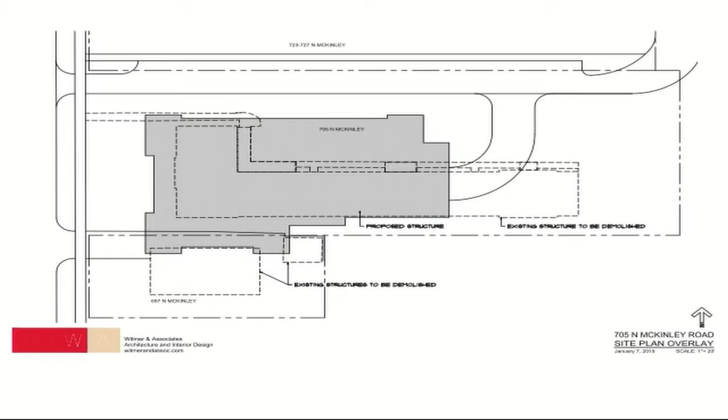It has 5-foot setbacks all around, and I think we respect that in all the setbacks. On the south side, we have 19 feet to the building face, and then 16 feet. Where our stair tower is in the corner, it gets a little tight at 6 feet, then back to 13 feet along the south edge. On the back corner, we have 33 feet from the new outlot to the back piece.

Just as in the first building, the terraces outside are important for those first-floor units since these are single-family residents, so we've developed outdoor areas that matter for those units. There's a screened porch along the south elevation, a terrace in the southeast corner, and another screened porch and terrace in the northeast corner.

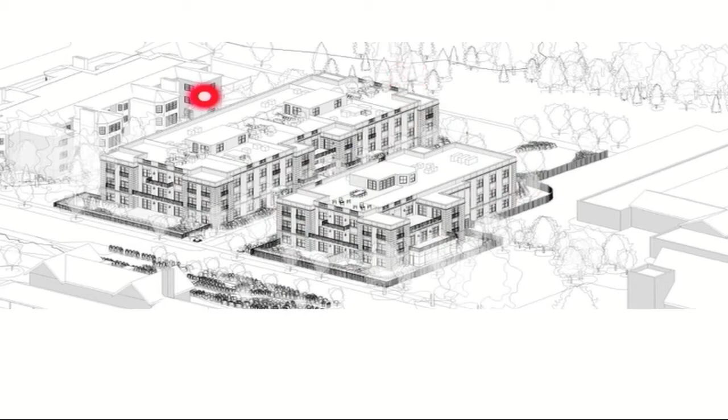This is just a bird's eye view looking at it from the south, actually looking northeast. This is our project that we're looking at, and this is the existing building, to give you an idea of how they fit together three-dimensionally.

This is looking back at the east elevation. So this is the existing building that's here currently, and this was our proposed building for phase 2. You can see the ramp that goes down underneath to the parking.

There are 6 units in the building we're proposing, and I think we have 17 parking spaces in the lower level. The shared parking will be perpendicular to the street, with parallel parking along here, and a couple of service spaces down in the northeast corner for additional parking.

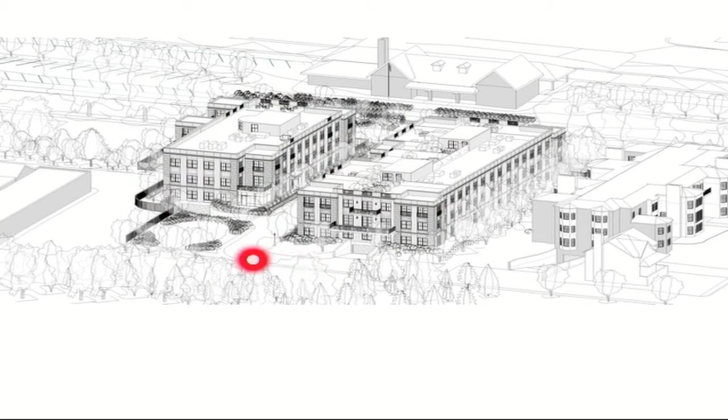The pedestrian access through the site allows people to walk through the street system and also walk through to the library via a sidewalk that connects this up. We talked a lot about pedestrian access for the overall project and making it pedestrian friendly, and I think our sidewalk system allows for that, so people can walk through the community.

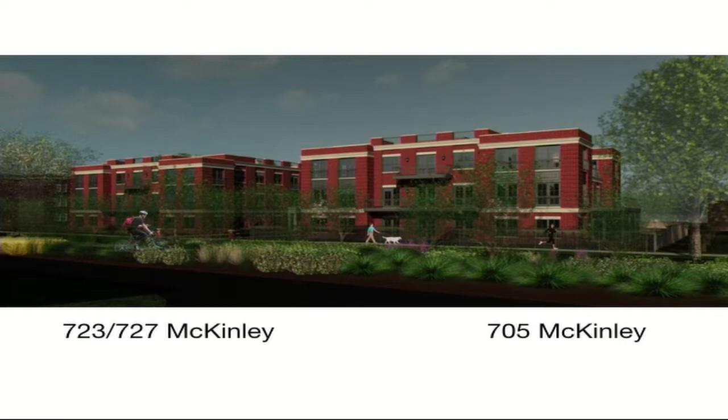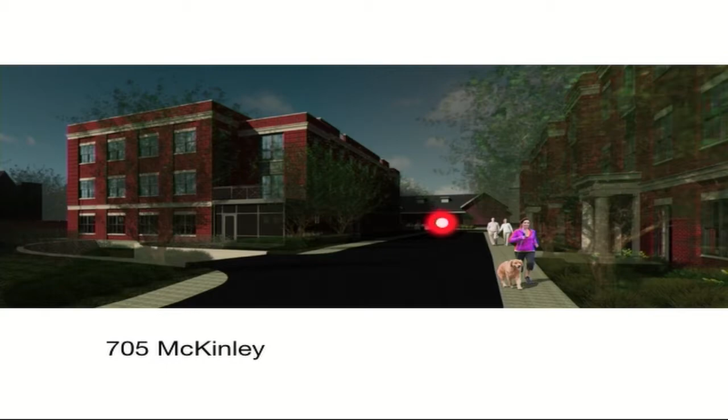This is just a picture of the first building, and this will be the 2 buildings together. This is looking west, so that's the train station here. Basically, all our detailing is really mirrored on the existing building—it's sort of a kit of parts that we put together to fit the configuration of the site on phase 2.

Thank you, Chairman Karen, members of the commission. This project has been under discussion for a number of years.

In 2014 and 2015, the City Council appointed an ad hoc committee, the Cultural Corridor Committee, to look at the area on the east side of McKinley Road between Westminster and Deerpath. The city knew that the Historical Society was looking for another location, so knew that city property would be in play.

We acknowledged that the office buildings, the three office buildings located on the east side of McKinley, were something less than Class A office space. And as the ad hoc group talked about it, they really discussed the importance of bringing residential development back adjacent to the central business district.

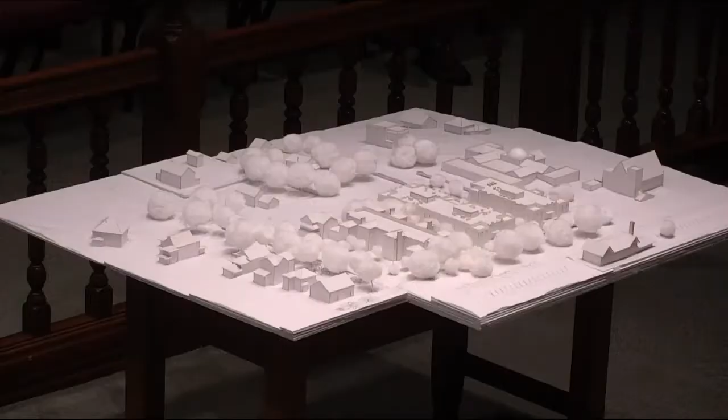So this piece before you for official action requested is approval of a plat of subdivision. A plat of subdivision is required because a portion of this property is being dedicated to the library, and now with the church property being part of this development, a subdivision plat is needed to identify Lot 1, which is the area on which the improvements will be constructed: the building itself, the ramp to the underground garage...

...the open space, and the outdoor patios, and then the outlots: one for the library, one outlot A, which will be retained by the church. As Mr. Wilmer said, it's the southern 20 feet of the existing lot on which the house is constructed.

So what is before you is the plat of subdivision. This project was before the Building Review Board last week, given that what is proposed is a building that essentially replicates the architectural details and exterior materials of the first building, with some change in massing.

With the schedule, we determined that moving this forward to the Building Review Board was appropriate in advance of your discussion, because the overall master plan had already been approved by the City Council. So this was essentially a piece of a previously approved plan.

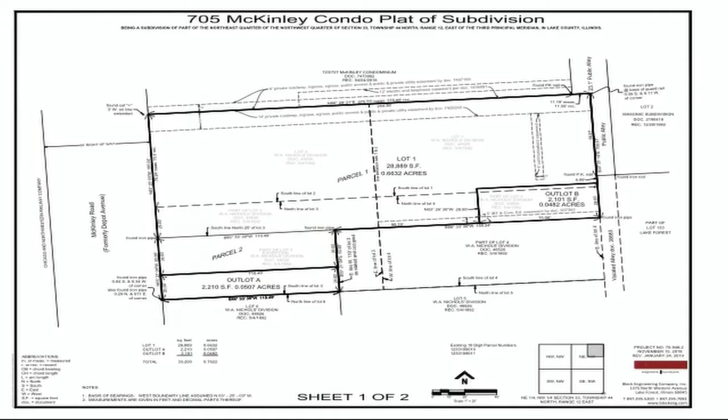Okay, yeah, so that was going to be one of my other questions. That church lot, Outlot A, it's a buildable lot then that the church could use in the future or sell it to somebody else and create a structure on that property, correct? The Outlot A, as it stands alone, a 20-foot wide lot, would not be a separate buildable lot. It will be combined with the church property, but the church certainly has enough property that they could in the future subdivide off the northern portion of their property if they chose to. Okay.

So my question is also a little bit about this open space and the trade-off between the land that the City of Lake Forest is selling, the eastern portion. So my impression is that the City of Lake Forest sold the eastern portion in exchange for some open space in this development. So we end up with a relatively small park to the east of the proposed building, and some land that's donated to the library. Is that correct? That's correct, and obviously there's a monetary exchange as well. Oh, okay.

The intent was not to create a park. This isn't intended to be a city park. It's simply a landscaped area to provide an opportunity for the library in the future to perhaps establish a better articulated north elevation, or perhaps to provide some improved pedestrian access to the library. So it wasn't intended to be a park, but more of a landscaped relief area.

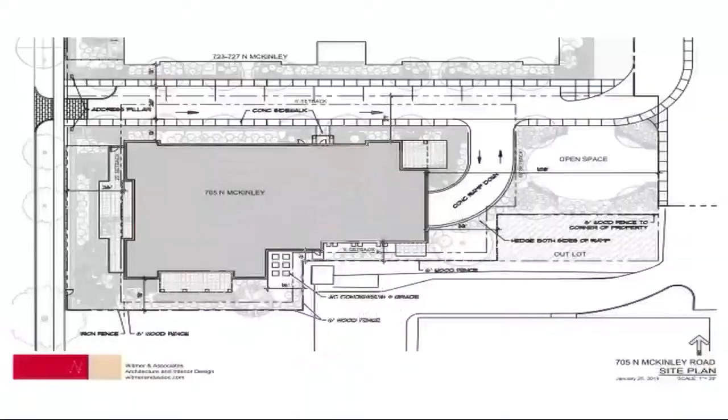Correct. All right, but right now the way it's designed, there's a 6-foot wood fence that would run all the way around the perimeter of the parking area, the building itself, and the parking area. I could understand why, from the residents' point of view, a 6-foot wood fence makes sense, because it shields the view of the back of the library. But my memory of the master plan, and the task force the city set up to look at this...

...was to make this, in fact, a corridor. They called it the cultural corridor, and there was supposed to be flow. To me, that flow, and I remember our discussion quite clearly, was not just pedestrian flow, although that's very important to the objectives, but you gave a really good description of the visual flows.

So when I look at your 3D diagram, here the property is, first of all, a great use of the property and a great partnership between the city, the neighbors, and the developer. But I'm worried, because you've got these 2 really unique structures: the beautiful now-historical train station, with a corridor view through to that, and the rotunda at the library. So these residents are going to benefit from these wonderful historical properties and views.

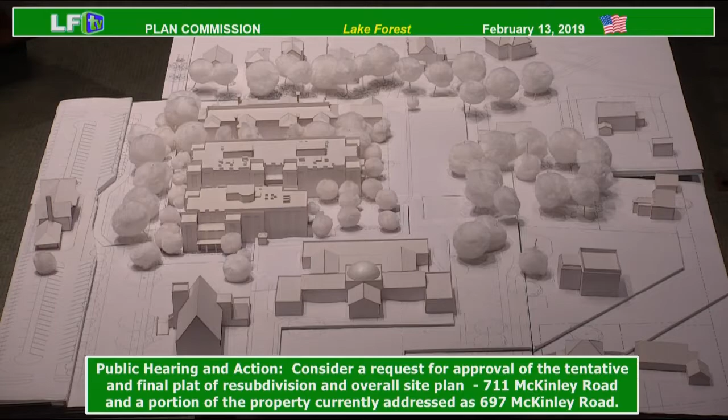I'm just concerned that we're going to throw up a wood fence around what could be a more open space, a more inviting corridor. Are we going to rush to pave over that area and make it 8 parking spaces with a big wood fence?

That's not what I signed off on when I was thinking of the master plan. I worry about those sightlines, and I don't know if that was discussed at all with the library. Are they still open to land banking? Where are we at on that?

I can tell you that the library would like those parking spaces tomorrow. They do believe they have a parking issue, but the library is going through its own contemplation of some possible changes. So we can certainly raise that discussion and pause and think about it. But I do know the library misses the spaces they used to use behind the Historical Society, and on most days, with their increased programming, they feel their parking is overflowing.

My thought there is, is there not a way we could create a pedestrian corridor from the newly remodeled and improved parking spaces right there across McKinley, and really do what the task force set out to do, which is create a corridor here, maybe more than one, Kathy, because 8 parking spaces is not going to solve some event that the library has.

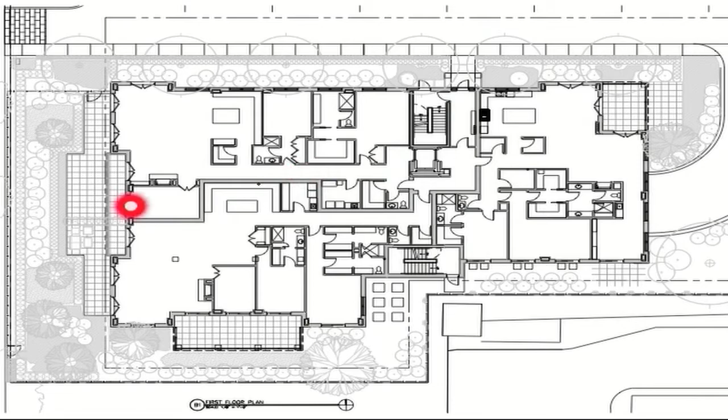This is the entrance. You come into the entrance here, you come in the elevator here. This would be 1 unit. We have this into 3 units, and so that would be the 3 units on the first floor.

The second floor, you come into a central elevator. From the elevator, you go directly into the units. This has been a very positive selling feature for the units, so that you don't have a lobby space. This is 1 unit, and then this is the other unit on the second floor.

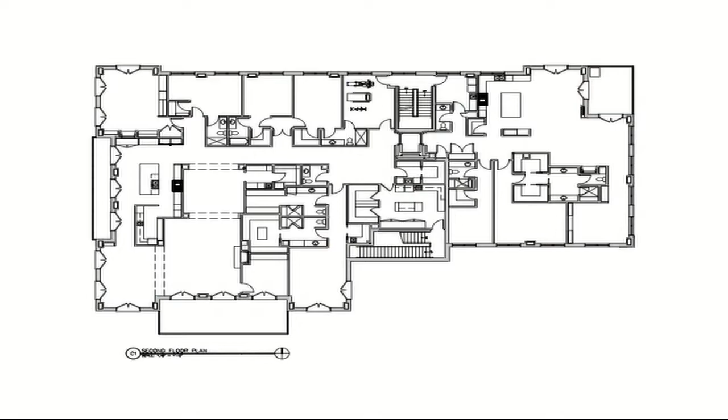And so the third floor is 1 unit that you come in. The whole floor takes up that unit. It could be re-subdivided into the elevator, and the access and egress would work to have 2 separate units on that floor too. So on the top floor, you have 1 entrance. How would you subdivide that unit if you have only the 1 entrance?

It has a double-sided elevator, so we'll have 2 doors on both sides, so you come in one side and one on the other side. So you could have at the most 2 units. Correct, that's like all the other floors. That's like our other building, the same configuration.

Well, I think it would have been very helpful to have this in the packet, and we're just getting a cursory look at it now. I understand. The width of the building is identical to the building that we currently have up.

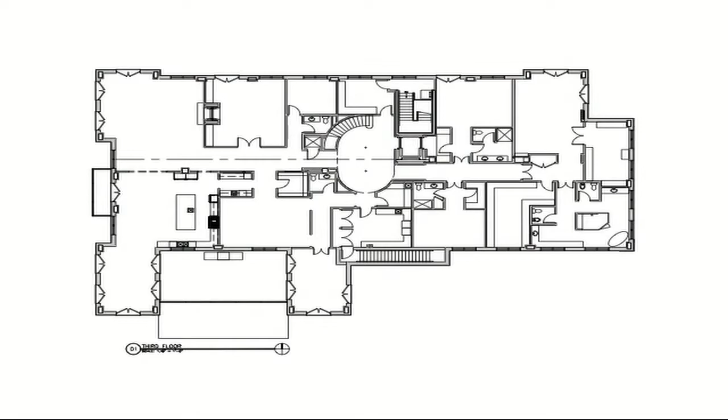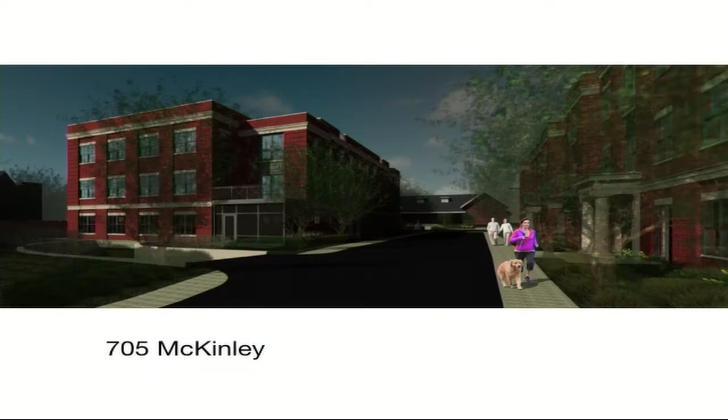So that is exactly what you see there on the site plan. Let's see, go back. Yeah, so it is exactly the width of the current building. So they're identical in the overall width. It looks a bit in proportion, but not quite identical in the materials we have. Perhaps that's just a different visual.

Yeah, here's the overall bird's eye. You can see the relationship of the 2 buildings there. And the existing building that we built is right around 16,000 square foot footprint for that. 723, 727 is 16,000 square foot per floor, are you saying? Per floor, correct. Yes, correct.

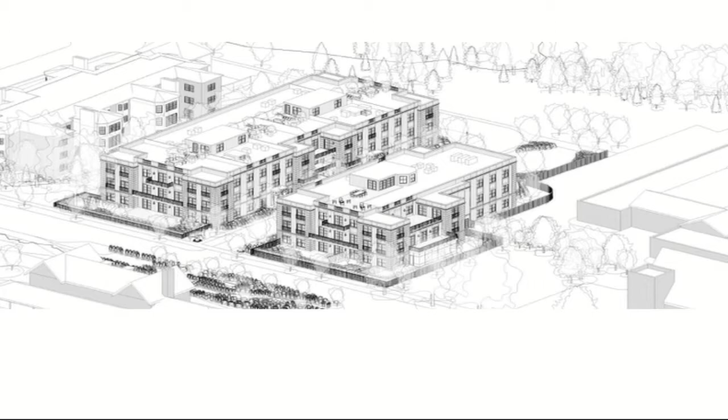Referring to Commissioner Ruggles' comments, I too see the dimensions of the open space to be different from the original approval. Seems to be a small square as opposed to a longer rectangle, and I would like to know the dimensions of what we saw at the Plan Commission and what is contained in our packet tonight. Also, and I'm surprised I'm raising this question since I'm not the architect, but you have a 3-story building and a small square of open space. How much sunlight is that open space going to receive from this building?

Because that, I get a fair amount, I have that same exposure, and by noontime there's very little sun left. And also, if you're contemplating even a 2-story building in what's listed as Phase 4, then that too is going to shade that open space for a portion of the day. So generally, people like to sit in sunlight, and I know we did discuss that in our initial proposal, and I would like to see a study of just how much sunlight this open space we all want is going to receive.

We're happy to do sun studies. We have this all modeled in 3D, and we can show how the sun moves there. The space between the buildings, we're very comfortable with. That's the same as Regents Row in terms of the light between those two buildings. So, you know, we can. Regents Row has different exposures.

It's the same east-west. The open space that we're contemplating here is between two buildings that are running east and west. Correct, Regents Row runs north and south. No, it's east and west too. Is it really? Yes, I think it's east and west too. It actually, Regents Row is longer. There's two buildings that are basically longer than these two buildings, so that the open space here really gets a bit more light than Regents Row.

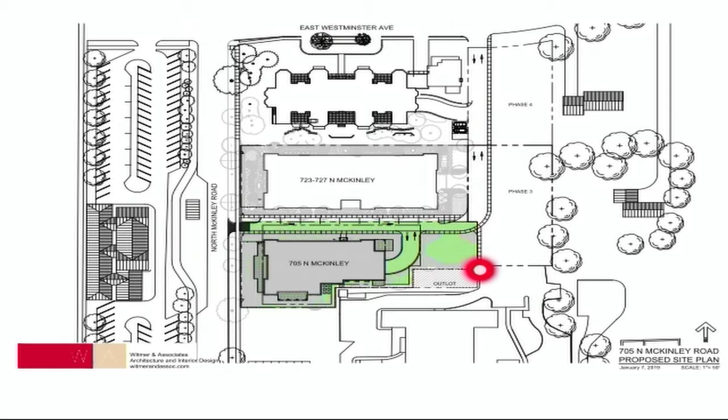So I think that what you all are debating or discussing has real merit, and I hear you and I understand it.

We can't give you answers on what we think is saleable in that future - small units, big units, whatever. I mean, the only thing I would say is that we've been successful because we've looked at what people want, and we feel pretty good about retaining some current residents who want to stay in Lake Forest.

We have one large condominium in Lake Forest. It's going to be here. So that's a pretty good thing in the CBD to get people here. We're all about bringing more people, keeping more people, making sure people go out to dinner, do all the services, pay real estate taxes, all those things. This all does that.

I think it strengthens our CBD so that we can support other things in this area. So I'm super excited about what we're doing, and whether it's a mix of small or big, I don't know. We're actually selling these things. We still have ones to sell. It's not an easy task in this marketplace to sell things.

So there has to be some understanding that we invest millions of dollars in buying these properties, and we looked to the master plan to guide us to say we should negotiate with the church - it was a great partnership. Economically, we were able to do it because we were confident we could sell it, that we could buy that. There's a real value to that.